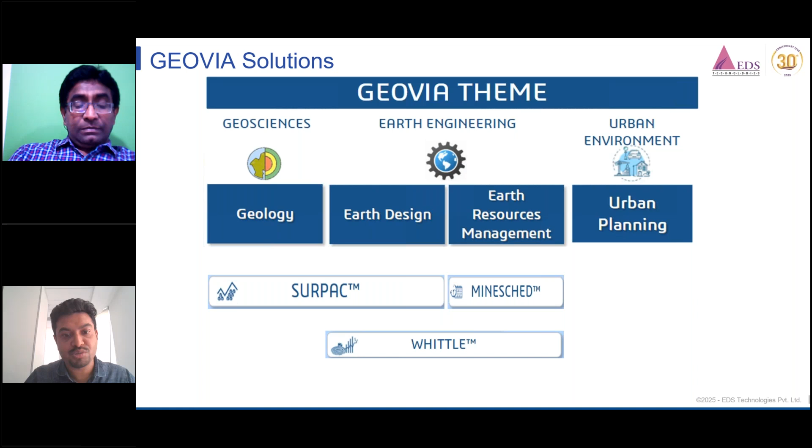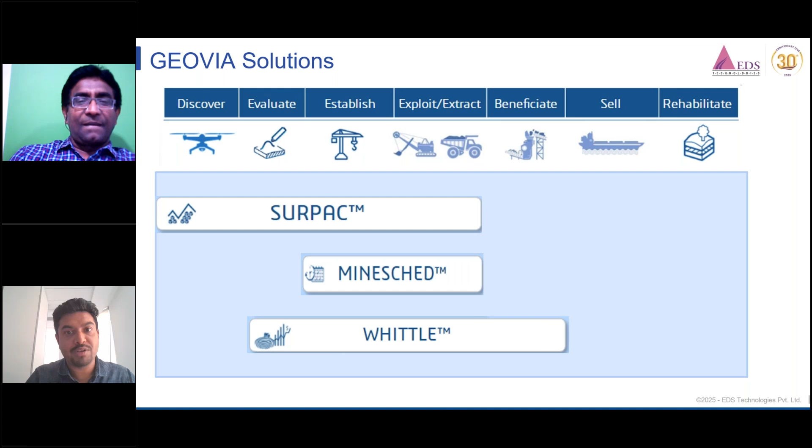So in the mining value chain or mining portfolio, these are the parts: discover, evaluate, establish, extract the material, beneficiate, sell, and rehabilitate. Surpac works in that first few parts. MineSched also works in the establish and extract portion, meaning up to the scheduling part, and Whittle covers the evaluate, establish, extract, and beneficiate portion.

So what is the relation between Surpac and MineSched? First is Surpac, basically used for stratified and non-stratified deposits like metal and non-metal deposits. Through Surpac we can control our survey data, geological data, and geological borehole database preparation, solid modeling, resource modeling, then mine design part: pit design, dump design, haul road design, ramp design, and blast design. Then we can use mine scheduling software for scheduling purposes, put the mining rules, put the target, and get the reports with animation.

So in the mining value chain, through Surpac and MineSched, we can cover everything from survey, drill data information, database preparation, then block model, solid model, estimation, open pit design, underground design, dump design, blending, and up to the end product. After blending, then target-wise, quality and quantity-wise, we can achieve our targets.

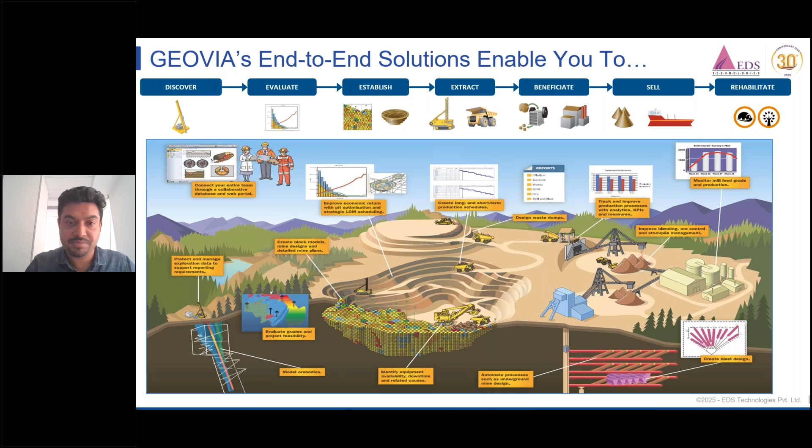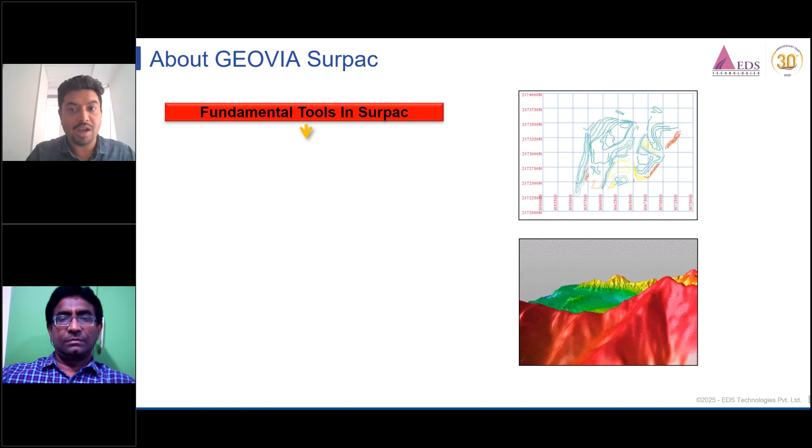In Surpac, first I'll start with the Surpac detail. So first it's split into a few parts. First is the fundamental tools in Surpac, where we can import CAD files or shape files, or digitize several things in Surpac software with coordinates in a 3D platform and make a DTM, digital terrain model.

Then import borehole information: collar, survey, assay, geology, and create this type of needle-like structure. Then geological sections, litho-wise or grade-wise, we can create sections in any orientation, maybe north section-wise, east-west section-wise, or oblique section. Then ore body modeling, called solid model.

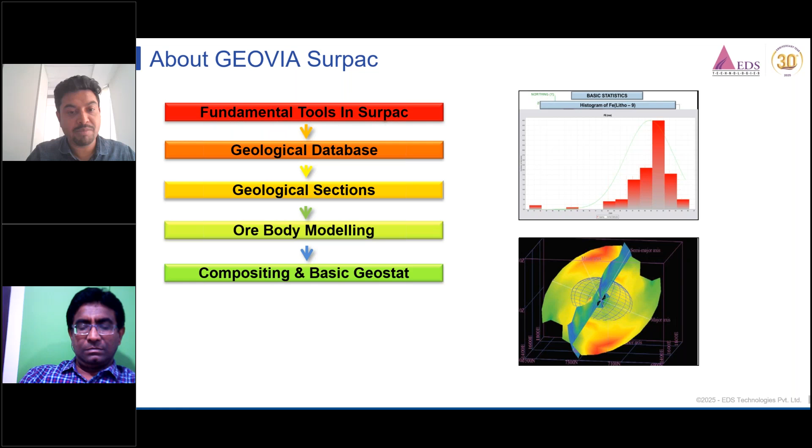After that, we split our solid model into a few small parts. It's called block model, and then resource estimation through several methods: inverse distance method, kriging method, or nearest neighbor method.

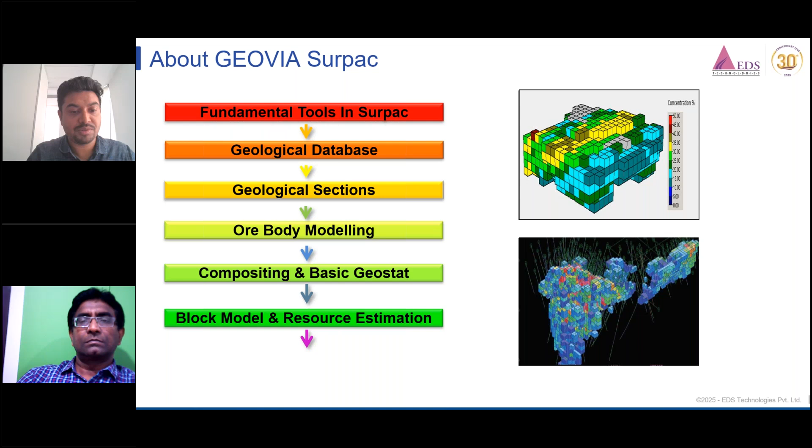Then we can create the slice plan. Several types of slice plans we can create: litho-wise slice plan, grade-wise slice plan, cut-off grade, or range-wise slice plan, and then start with pit design and dump design. This is the workflow of Surpac software.

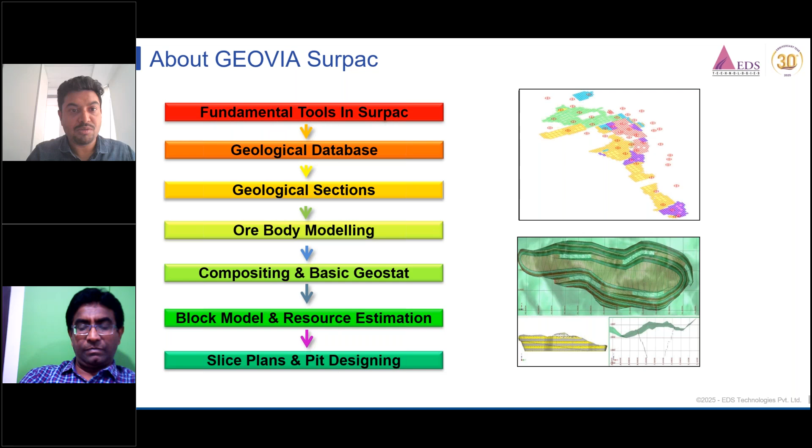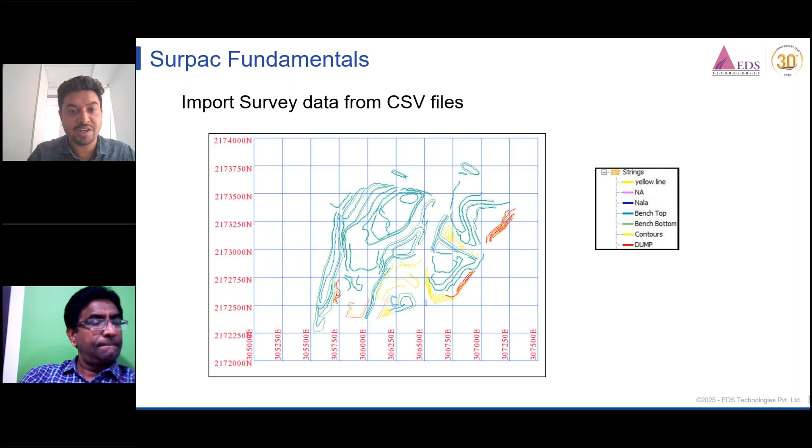So next, we can import a CSV file, drone data, or any type of DGPS survey file and create this type of CAD-like information and create the DTM file format. Now Surpac is capable of importing point cloud data in several file formats, LAS file format or XYZ file format. There are 6 types of file formats we can easily import and get the point cloud data. We can edit all those things and reduce unnecessary points to make the DTM file format.

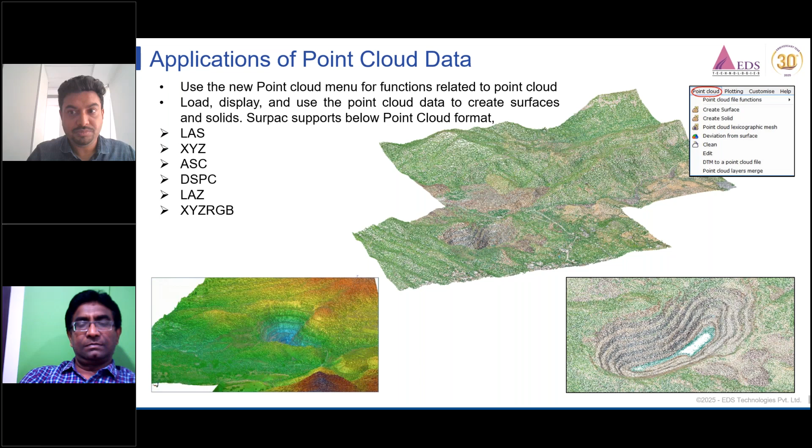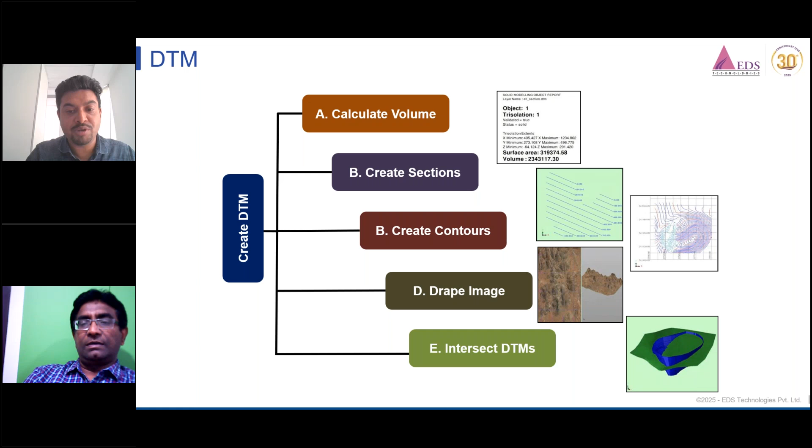After DTM, digital terrain model, we can calculate the volume between 2 DTMs, cut volume and fill volume separately, create sections in any orientation, create contours at any interval, meaning major and minor contours, both we can handle simultaneously, and drape an image over the DTM to give a realistic look. Image means scan data, image data, satellite data, or Google Earth image, which we can easily import here, and intersect DTMs to calculate the volume between 2 DTMs. This type of operation we can easily handle.

Then resource modeling. First we create a borehole database using collar, survey, assay, geology, these types of information. Then we validate our data. If it is successfully validated, then we start the cross section, litho-wise or grade-wise, and then make the solid model, block model, and get the resource reporting.

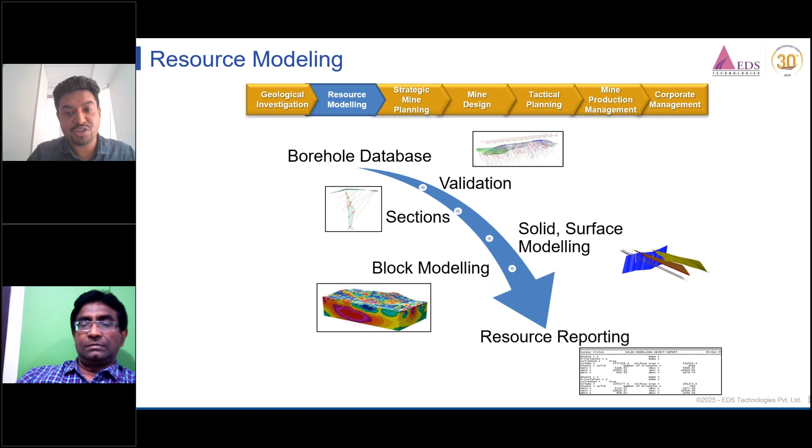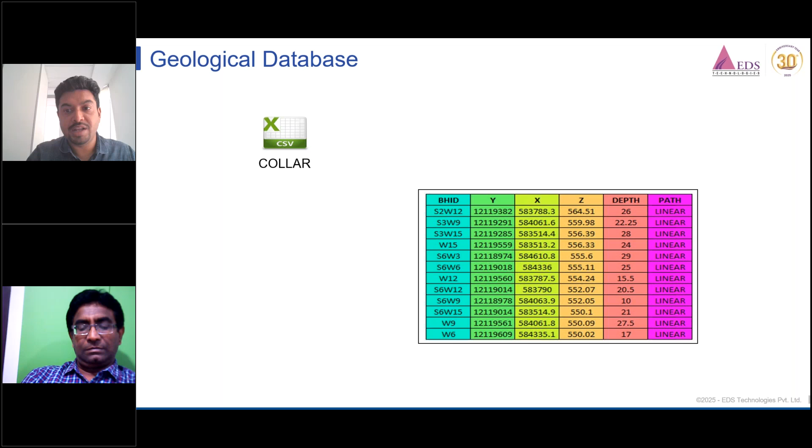In the geological database, first we create collar data. Here borehole ID, Y, X, Z, northing, easting, RL value, depth, and path should also be mentioned. Then survey: borehole ID, depth of the borehole, and azimuth. If it is an inclined borehole, the azimuth and depth should be mentioned here.

Then assay, which keeps the radical values also. If it is silica, alumina, if it is an iron ore deposit, or a limestone deposit, the radical will be changed.

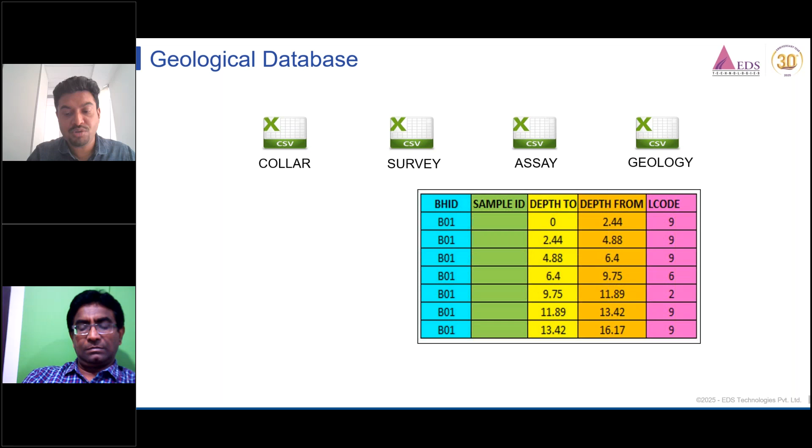In case of the geology, the L code or lithological description and rock type should be mentioned here. After importing these four CSV files, we can create this needle-like structure or borehole database. Borehole database management and ore-waste classification are possible here.

We can create composites, create sections, geological interpretation, high grade samples, low grade samples. The weighted average we can calculate easily here and get the report. Not only that, we can also create graphical logs with plot file.

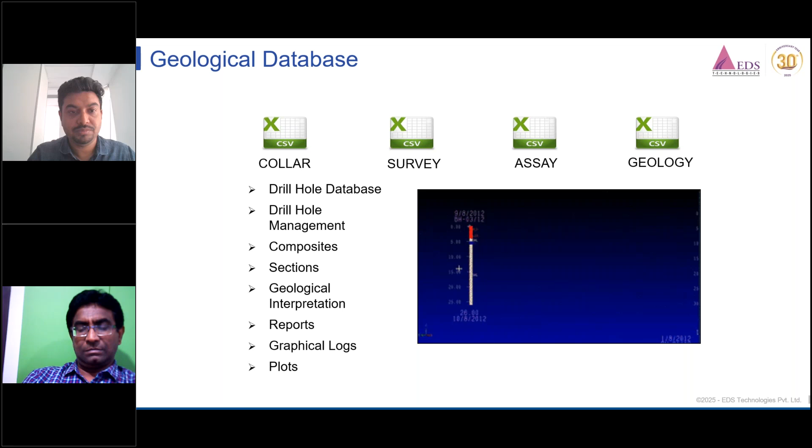Then basic statistics. After compositing, we can import those composite files into the basic statistics platform to create the histogram, cumulative frequency curve, percentile, QQ plot, Fe versus silica, silica versus alumina plots. Through this basic statistics window we can do block model validation, basic statistics calculations, and generate basic statistics reports: number of samples, minimum value, maximum value, mean, median, geometric mean, variance, etc.

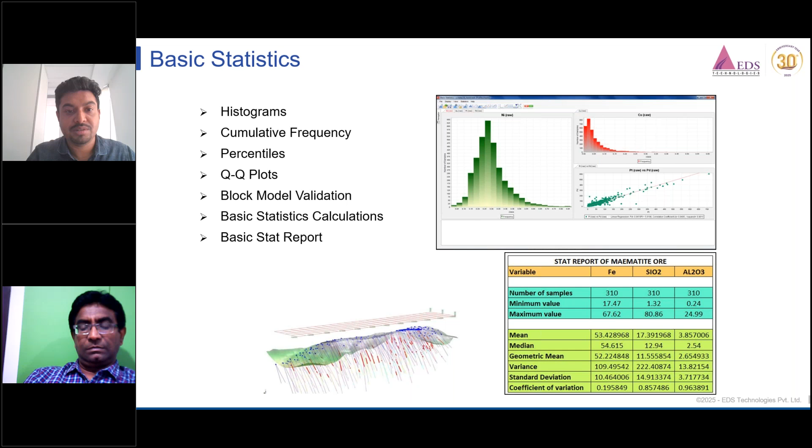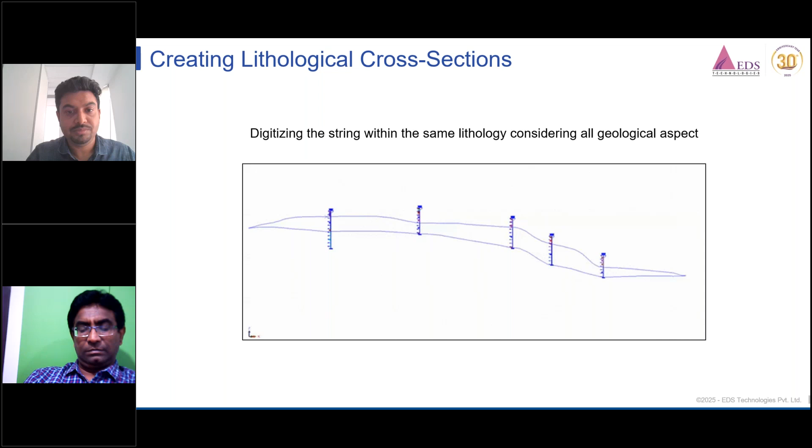So after database preparation, we start the digitization of the section, litho wise or grade wise, with structural information. One by one, after digitizing sections, we can join each other and create a solid model, either litho wise or grade wise.

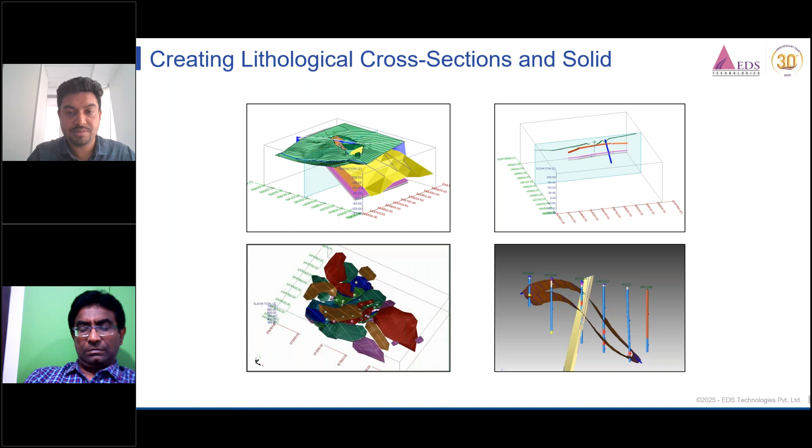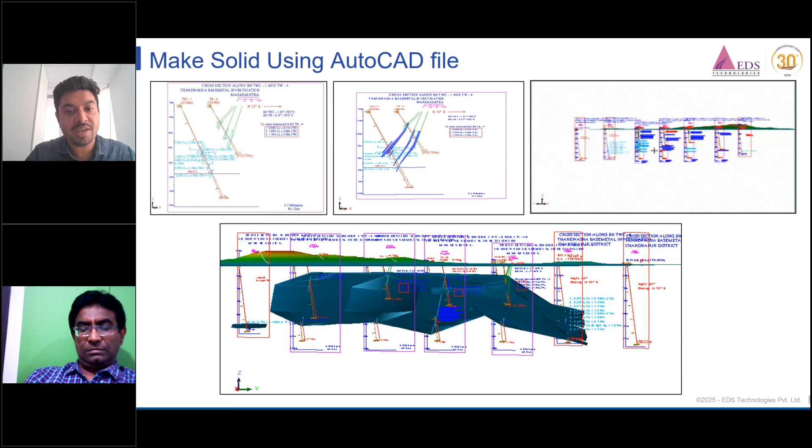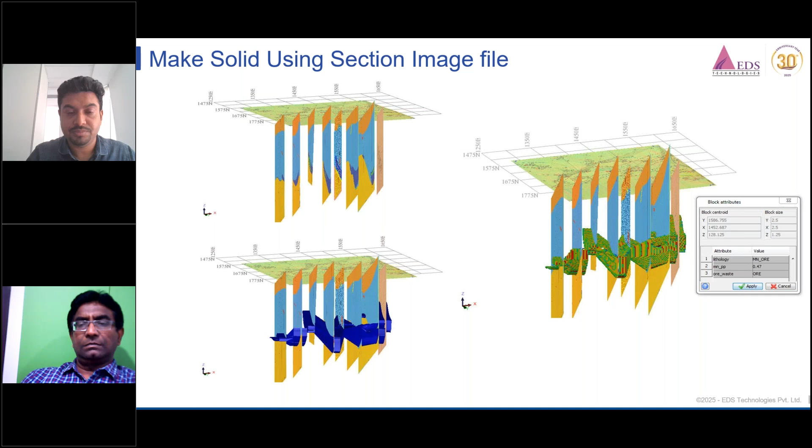So up to that level, we can control the explicit modeling. Now in Surpac or in the GEOVIA platform, we can also handle implicit modeling.

This implicit modeling or geology modeler role is fully integrated with the 3D Experience platform, and fast implicit 3D geological modeling can be prepared quickly to save time. It will display interpretation, stratified geological model, compositions, and rule-based classifications easily.

Grid cell modeling we can easily control here. This is totally the implicit modeling part. We can also control the geoscience interpretation and geology modeling part.

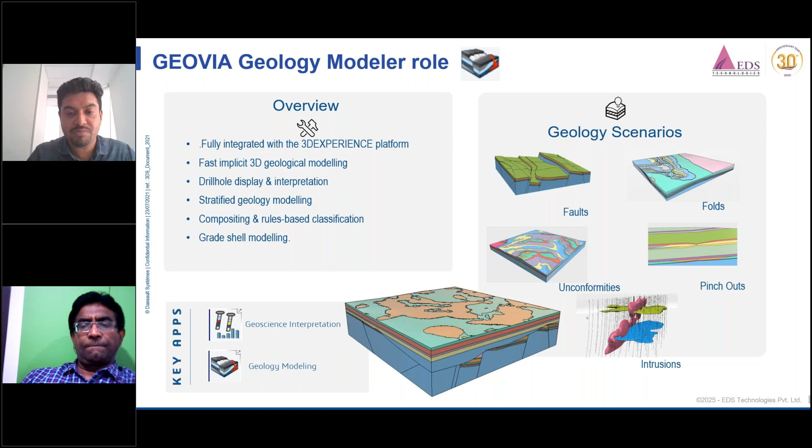Here we can see the geology modeler part, fully integrated with Surpac software, for faster geological modeling, geoscience data handling, reducing rework, and collaborating and engaging with team members and stakeholders.

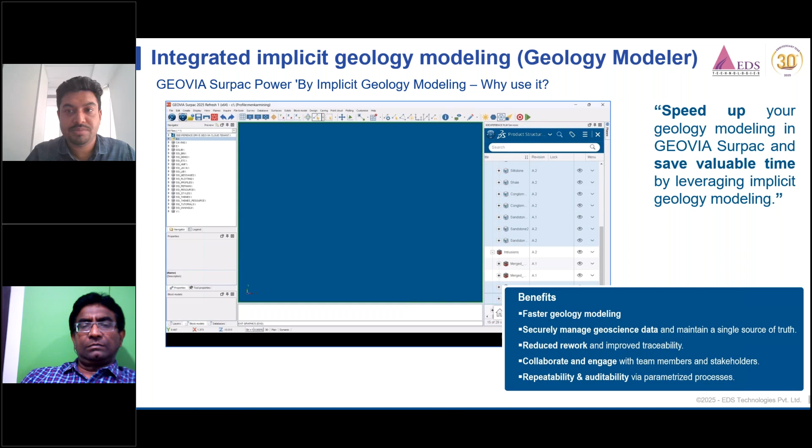After implicit or explicit modeling, we start the block modeling part. Here we can split our solid model into small parts. The dimension of the blocks is totally dependent on the borehole spacing, typically 1/3, 1/4, or 1/5 of the borehole spacing, and sub-blocking is also possible for more accuracy.

We create attributes like Fe, silica, alumina—512 attributes we can create in the block centroid—and create constraints below the topography, within the lease boundary, below topography and above the ultimate pit. This type of constraint we can easily create to normalize our blocks, and then estimate grades through inverse distance method, Kriging method, or nearest neighbor method, and get the report.

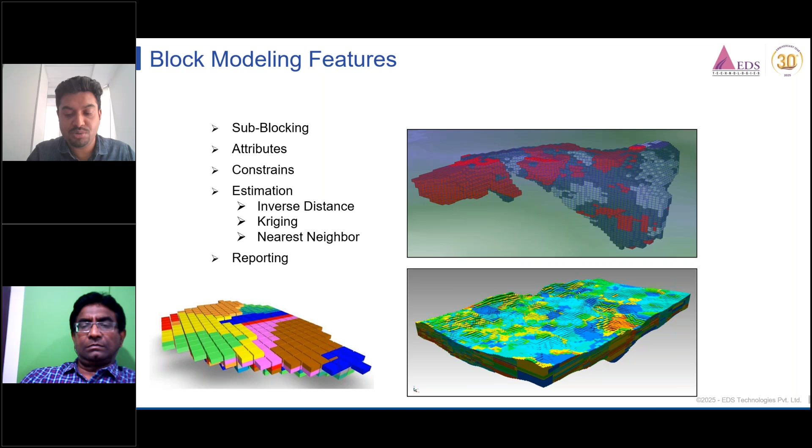After estimation, we can color our blocks in different ways—lithology wise or grade variation wise—and generate different types of reports: user-defined reports, templates we can save for future use, lithology-wise report, grade-wise report, RL-wise report, or section-wise report.

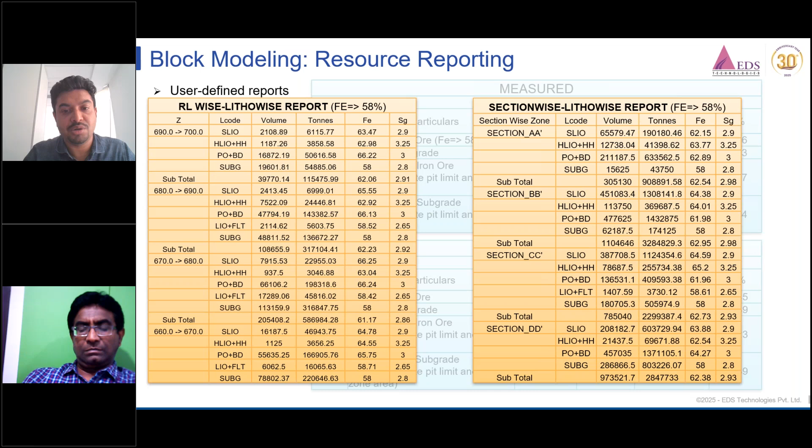So here we can see RL wise litho wise report, and section wise litho wise report, based on the cutoff grade or grade range wise or lithological wise, which we can easily create or generate based on our requirement.

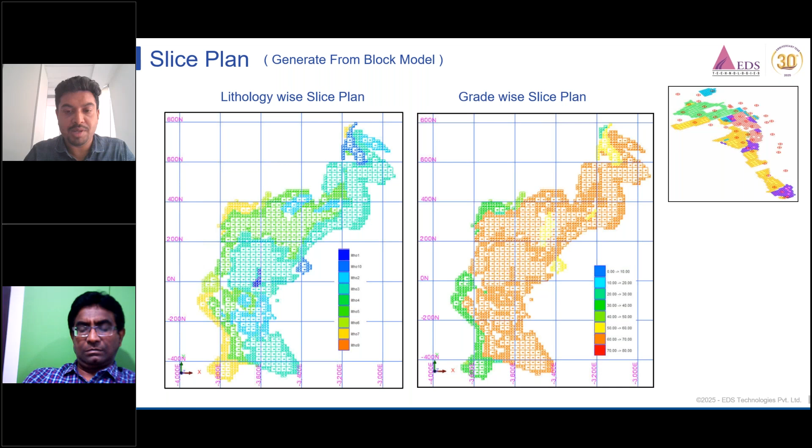After block model estimation and generating the report, the next part is the slice plan—litho wise slice plan or grade wise slice plan—which you can easily create RL wise, and then you can start pit design.

In pit design, based on the slice plan: ore portion, dump design, dam design, ramp design, and switchback—a 180-degree rotation of the road within the pit is called switchback. We can easily handle all these things, and volume calculation within the pit.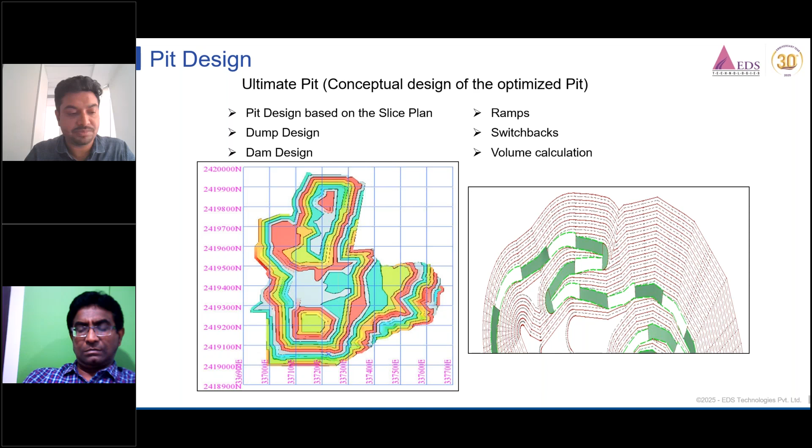Within the pit, below the topography and within the pit, we can calculate the reserve reporting. Here also we can define user defined reports, save templates for future use, and create bench wise litho wise reports, bench wise grade wise reports as well.

And then come to output. So surface plan plotting, with borehole, section, lease boundary, safety zone boundary, contours, bench toe, bench crest, and surface outcrop. Also, we can identify these in the plot file.

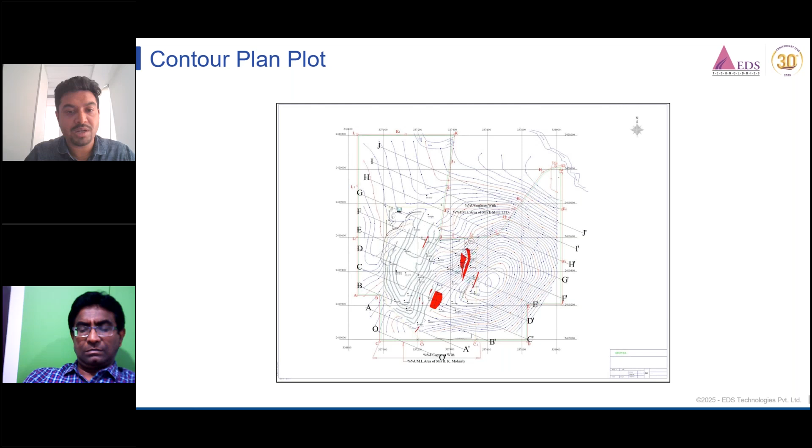Borehole log plot. Individual borehole you can plot separately. Section, several sections we can plot in a single sheet.

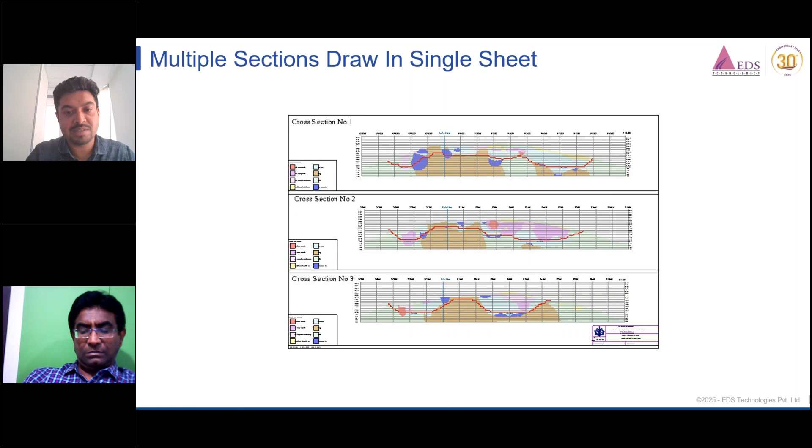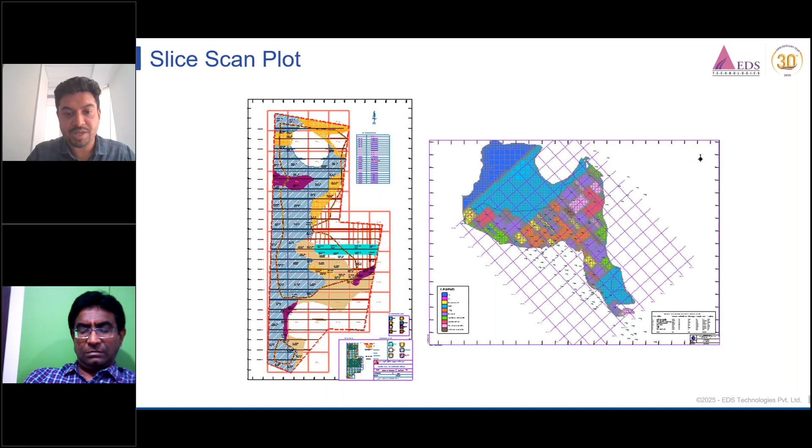In slice plan, with all the requirements, meaning grade-wise slice plan or litho-wise slice plan, you can easily plot in different paper sizes. So this is the interface of the Surpac software.

So here we can control several files and several section planes, also we can save for future. And in the user graphics interface, we can split into several parts to control several data at a time.

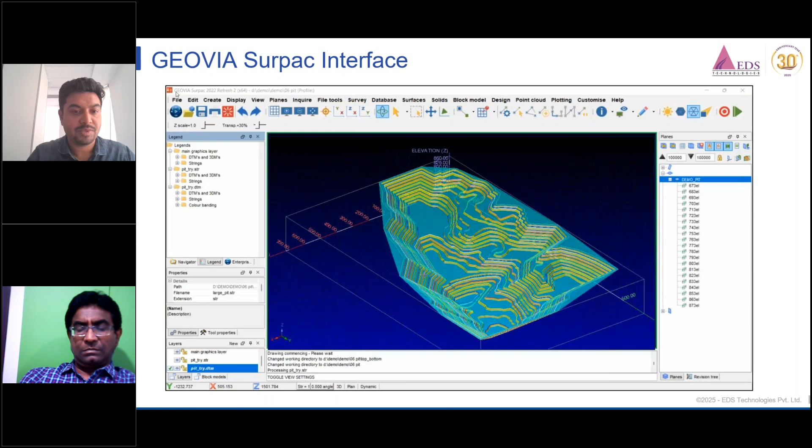So next, production scheduling is the GEOVIA MineSched. This is another product. After Surpac, we can use this product for scheduling purpose.

So here, generate plans and schedules, achieve target in terms of grade and tonnage, generate report, period-wise grade and tonnage.

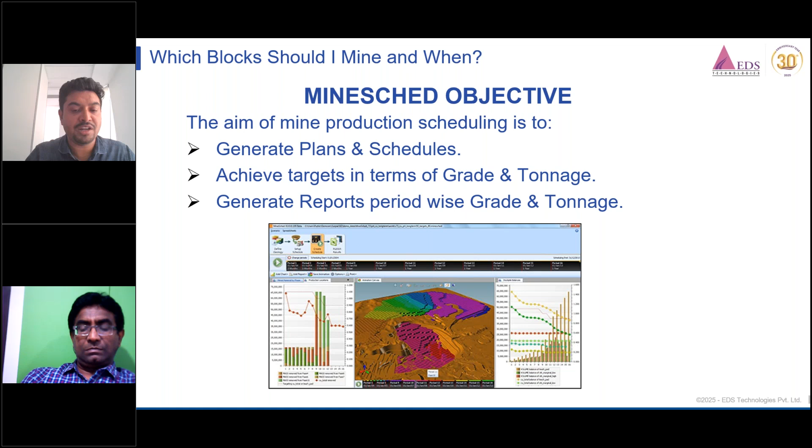So for data format, several data we can import into this mine scheduling software. Surpac block model data, not only that, Datamine data, Gemcom, Vulcan, Whittle, Minex, CSV files also we can import, and string file format or polygon.

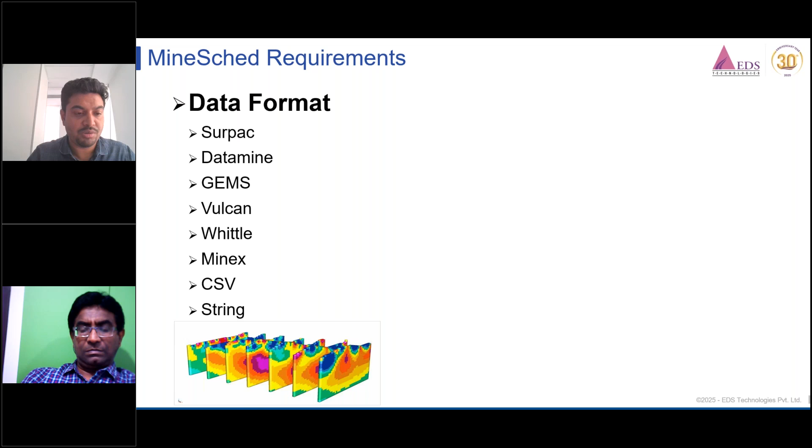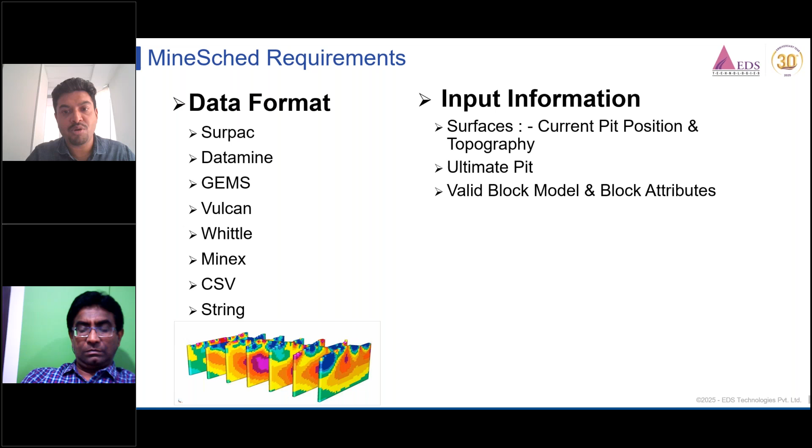And input information like surface, current surface is very important with other topographical information, ultimate pit limit, then valid block model with all attributes, mining constraints below the topography, above the ultimate pit limit.

These blocks are very important for further scheduling. Material class definitions, grade-wise or litho-wise, you should classify your block model first, then only you can start the mine scheduling software. Then we can identify or import several types of polygons for selective mining.

And available resource capacity is very important. Per day wise, your capability or resource capacity, it should be mentioned here. And the target, quality, quantity, you should mention.

Suppose 2 million ton in a year, and your quality will be 62% Fe value, and silica less than 2.5%. This type of quality and quantity should be mentioned

in the mine scheduling software. And scheduling period, monthly or quarterly, half yearly, yearly, or 5-yearly, you can run the scheduling up to end of life of mines. In short term to mid term to long term, you can run this scheduling.

So this is the interface of the mine scheduling software. So here we can import the block model and several types of data sets, and define the material class, quality, and then run the software.

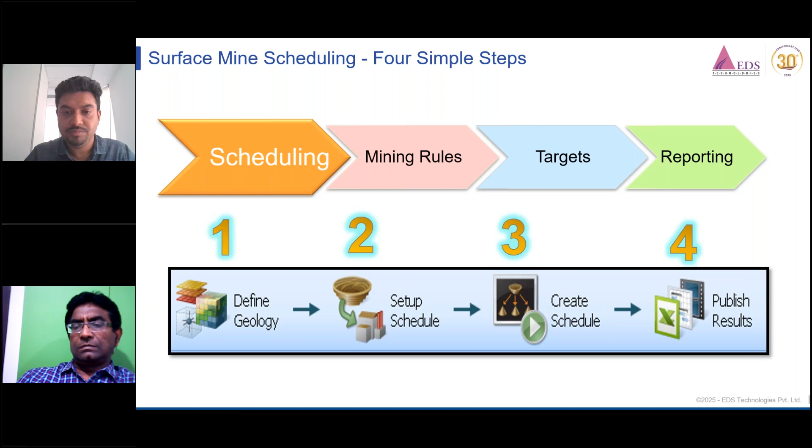So here in surface mine scheduling, we can control multiple mines at a time in the mine scheduling software. The mine scheduling software is totally rule-based software. Put the targets. It is used for long to short terms.

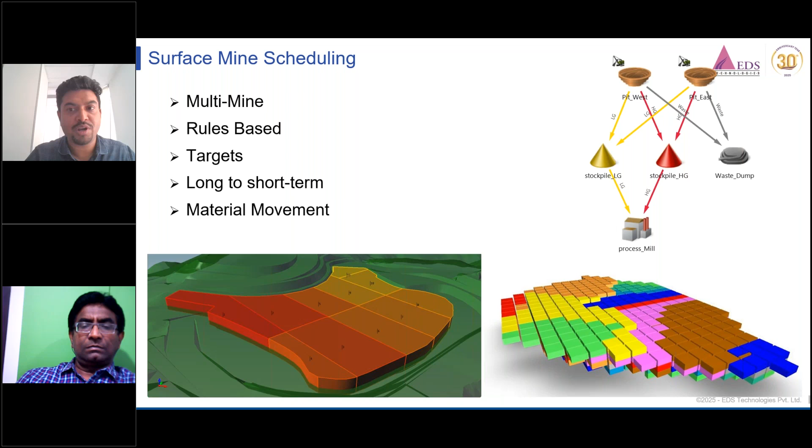Material movement is very important from one location to another location. Calculation, graphical output, animations - you can see the animation - and different types of reports and histograms we can generate.

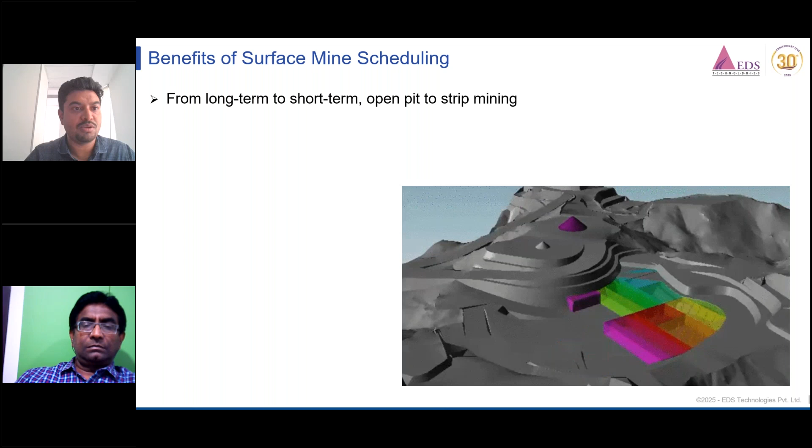So the benefit of the surface mine scheduling or MineSched: one is that it is long term to short term for open pit or underground mining. Not only that, strip mining is also possible here.

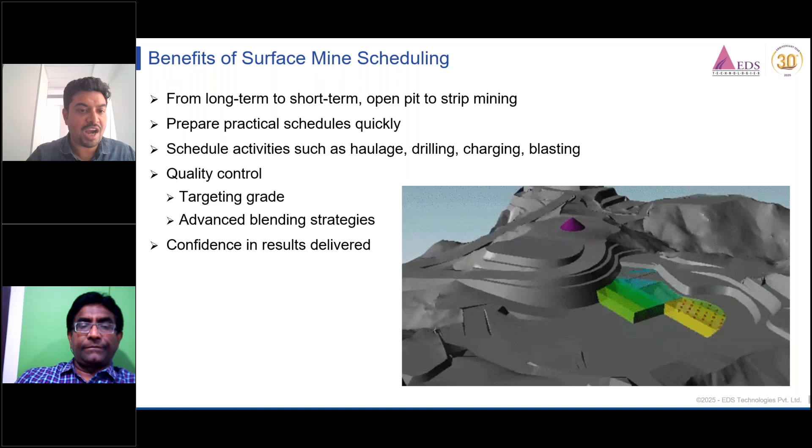Prepare practical scheduling quickly. Then different types of activities we can introduce here for short term scheduling, like haulage, drilling, charging, blasting, to calculate the actual delay. Not only that, quality control, targeting grade, advanced blending strategy we can control here, confidence in results delivered, etc.

Then in define geology, we can import the block model, cross check the block model, if anything is wrong or not. If it is okay, then we can proceed further. And if any calculation or expression is missing, we can easily calculate here.

Suppose LSF for limestone, lime saturation factor - this attribute is missing in our block model, so we can easily calculate it in MineSched software.

Then validate your data, and if anything is wrong, use the auto check for errors option. Through these options we can see the actual error and rectify it in the block model and refresh everything in this platform.

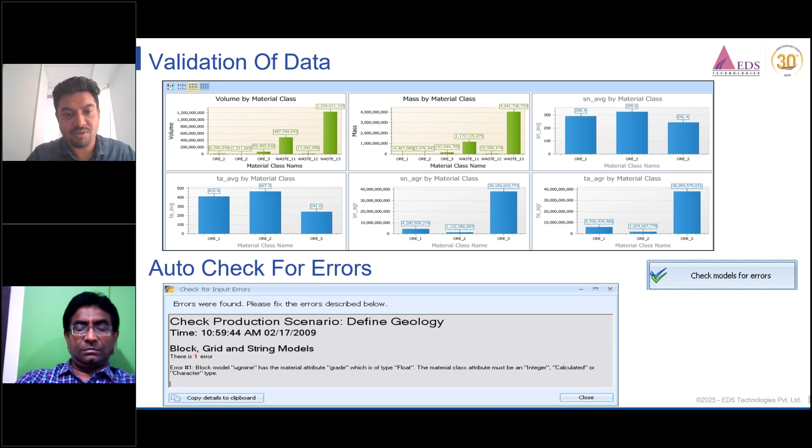For short-term scheduling, here we can introduce drilling, blasting, and then start the mining activities. These drilling, blasting activities are basically used for short-term scheduling, on a monthly or quarterly basis.

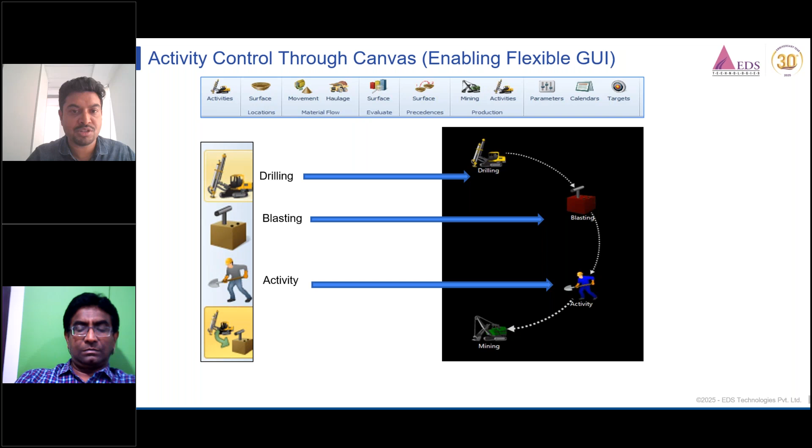Complex material movement we can control easily. Multi-mine location and material movement we can handle. We can handle several stockpiles and dispatch locations. We can set one point, and then control our ultimate targets, quality and quantity wise. And not only that, we can handle dump locations also, meaning dump scheduling is possible here.

So there are two types of dump scheduling we can handle in MineSched software: in-pit dumping and ex-pit dumping.

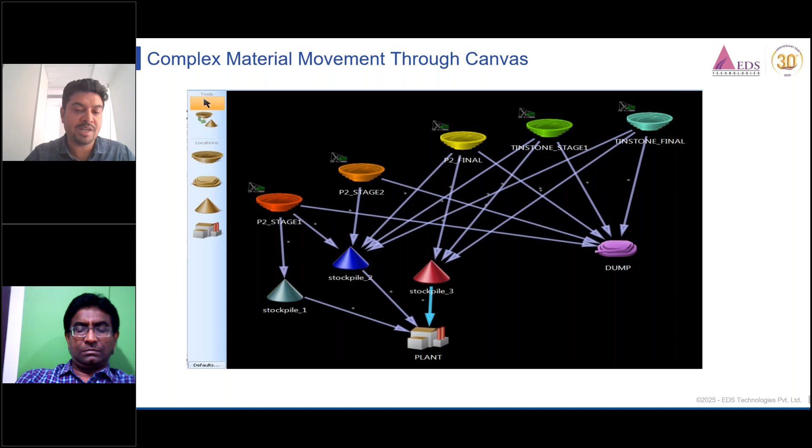In blending strategy, a very positive side of MineSched software is the production blending capability. It is a good strategic software for this, and stockpile strategies result in high quality material to the plant after blending.

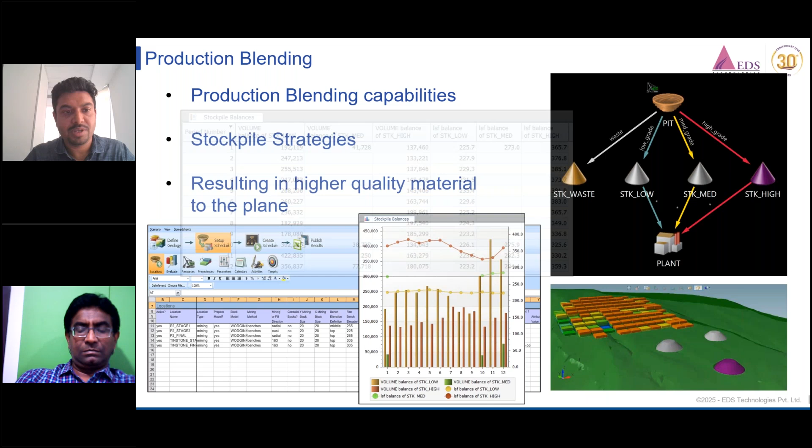And this type of report we can generate. This is the interface of the MineSched software after creating scheduling, and we can easily visualize the material volume, tonnage, and grade in different mining locations.

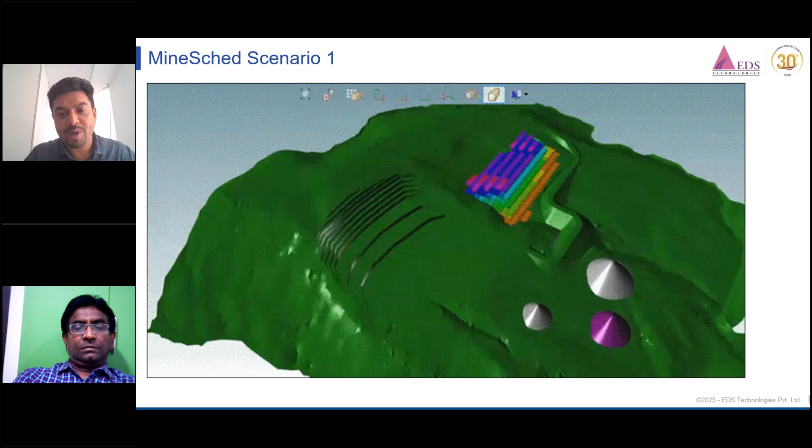So this is MineSched scenario 1. Here we can see MineSched happen in a mining location, and simultaneously dump scheduling is also working, whether in-pit dumping or ex-pit dumping. And not only that, stockpiles are controlled monthly after blending strategy.

Strip mining is also possible here to meet our target. Strip mining is basically used for limestone deposits or surface/subsurface deposits through a surface miner.

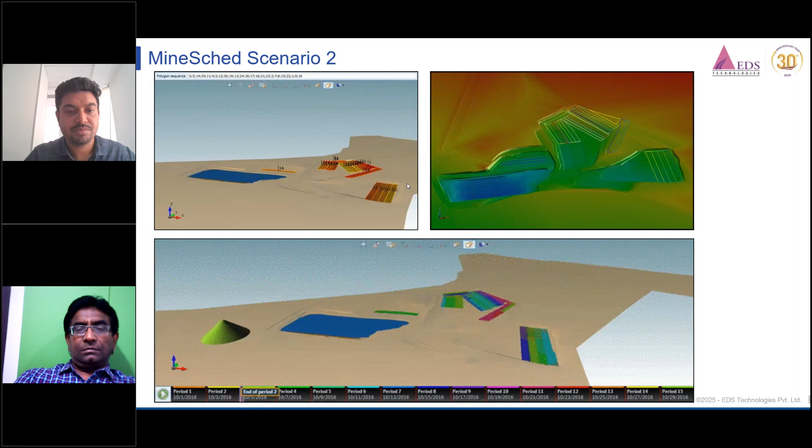Then through scheduling software, we can generate yearly production plans and reports easily. The first year production plan.

With dump area, first year dump. The second year production plan and DTM, with second year dump increasing in a certain direction because it's totally hilly terrain, with report.

Third year production plan and DTM with third year dump. The fourth year.

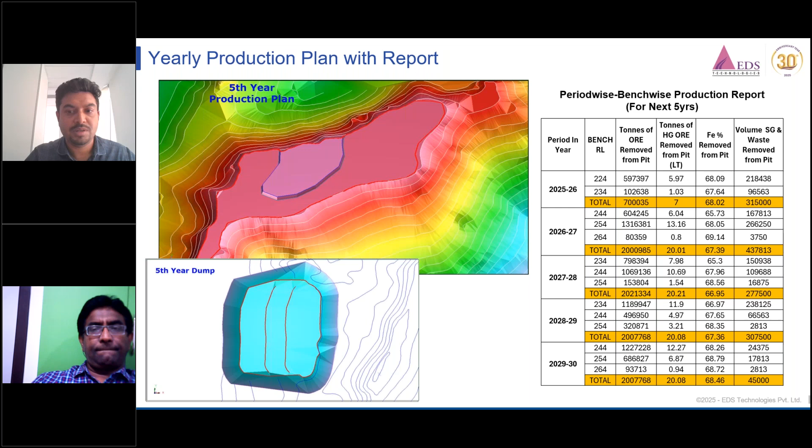Fifth year. And then we can see the yearly growth of the dump: first year, second year, third year, fourth year, and fifth year. And this is the production plan in plot file format.

Not only that, after creating scheduling, we can easily generate histograms and stack bars with lines. So we can see how production will vary, or whether the stripping ratio will stay within control or not.

And this type of current pit and monthly pit we can generate, meaning short term scheduling. There are 2-3 locations we can activate in a month, along with stockpile locations, so we can create this type of plot file here.

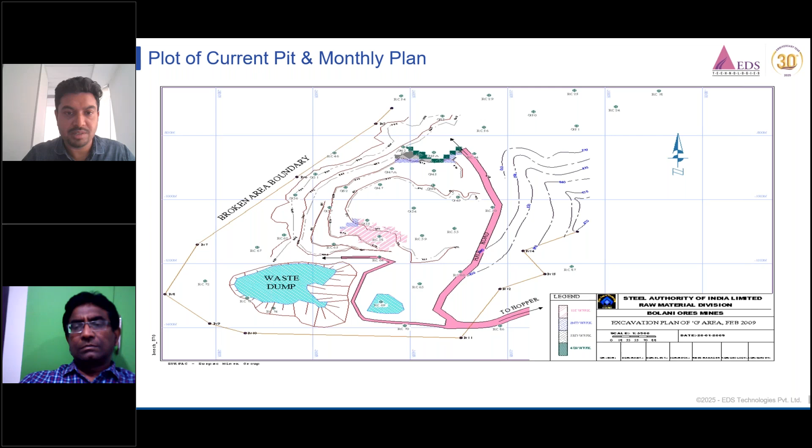And finally, after production scheduling up to the end of life of mines, we can update our block model with new attributes. After that, we can open this block model in Surpac software and cross check.

So we can check how many blocks are mined in first year, second year, third year, cross check the volumes, and cross check the position also. If you are not satisfied with that, then again we can open the MineSched software, change the direction, change the parameter, change the bench number, and create another scenario.

So several scenarios you can generate simultaneously, and then you can choose the best one for your operation purpose, or for your report purpose, or scheduling purpose.